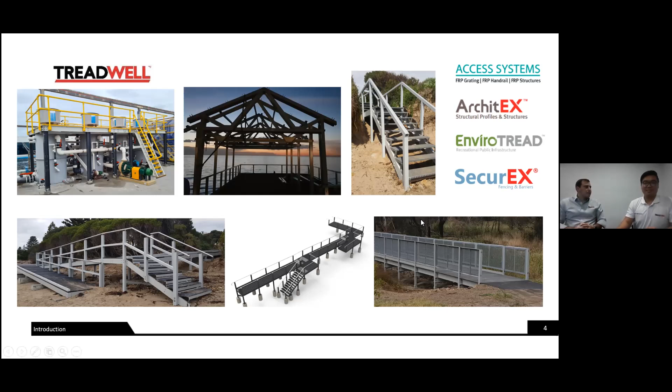So here are some SpaceGass model examples. So the modeling method will be the same as modeling timber structures or steel structures. However, in the market, there's no structural analysis software to help us choose the correct size of FRP member. Therefore, SpaceGass could only help us to determine the deflection and the required design loads like shear, bending moment, and tension and compression. So we can base on those design values and compare with the standard.

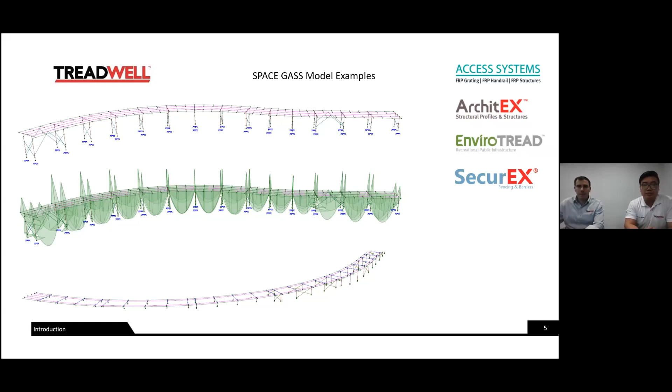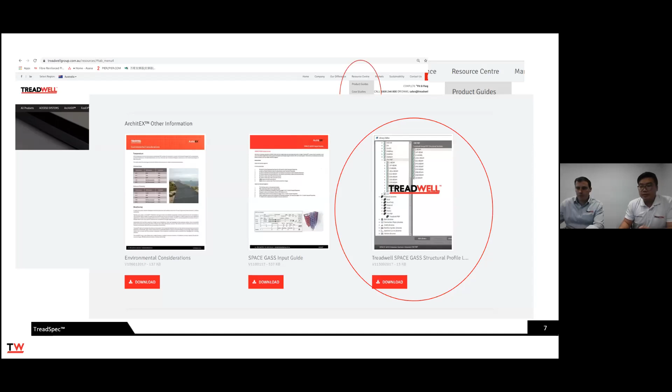So Treadwell Group provides the SpaceGass member library so that the user doesn't need to spend extra time to draw the layout of the sections. Now I will show how to download our profiles. First, go to our homepage and go to Resources Center. Scroll down and you will find a download button, and then you can click download.

After that, you can copy the SLM file and the SLS file to the SpaceGass library. And this includes the FRP material properties and also the Treadwell profiles. As you can see, you can download the I-beam sections, C sections, equal angle, and square hollow sections, etc.

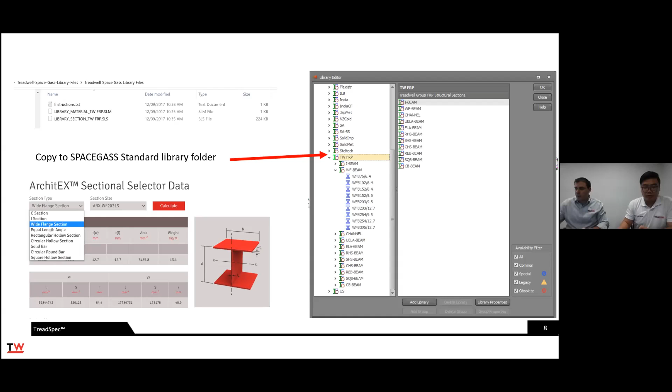So when you select the profiles, it will show the geometry of the section, like the moment of inertia, the height, the width, the thickness. For the Young's modulus of FRP, as you can see on the screen, we are using 19.6 GPa. So actually, it already considers some reduction factor based on the ACMA pre-standard, which considers the resin type, temperature, moisture, and if you need to consider the long-term deflection, like a longer design life or higher temperatures, or there are some extra chemicals, maybe you need to further reduce the Young's modulus.

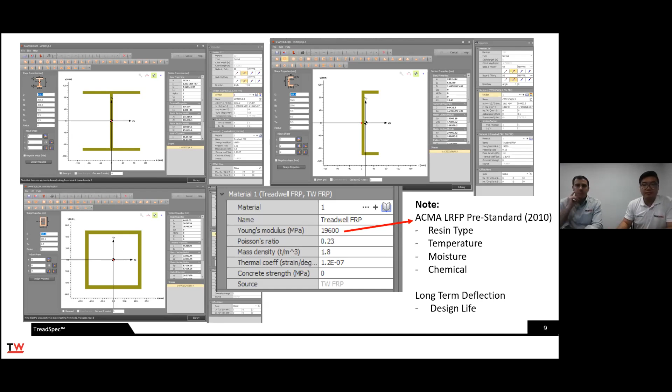Next, I will demonstrate an example. So the post spacing will be within 3 meters. The width will be roughly 2.4 meters. The height of the columns will be 0.7 meters to 1.5 meters. The live load will be 4 kPa. The wind region is A1. So as you can see in this example, we use different kinds of our Treadwell profiles.

Let's say the post, we are using a square hollow section, 102 times 8 mm thick. For the outer joists, we can choose C sections, 152 high times 9.5 mm thickness. For the inner joists, we can use the wide flange beam, 152 times 9.5. For the bearers, normally we will use double C channels, like 203 times 9.5. For the post bracing, we can use the equal angle, 102 times 9.5. So when we do the SpaceGass model, normally we will assume the joints as pin connections because FRP we can't fix them.

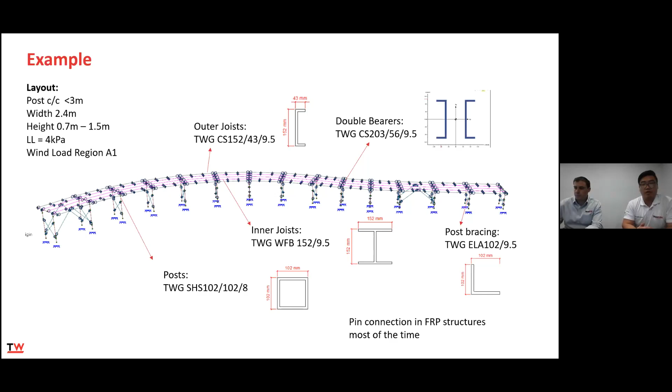So now we talk about the procedure for the design check. So as I mentioned in the beginning, we can use SpaceGass to do the checking for the deflections. Like in this example, for the inner joists, wide flange beam, the deflection is roughly 8.9 millimeters, which is smaller than the span over 250 or span over 300. So it passed the SLS. So the reason that I'm first checking the deflection is, unlike steel, FRP doesn't have that high Young's modulus. So based on our experience, most likely deflection will govern the design first.

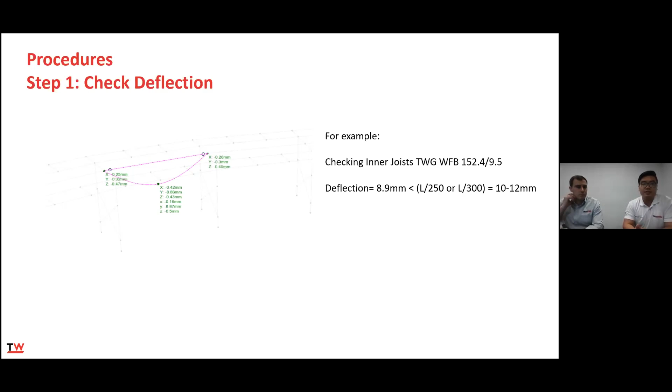So after we do the deflection checking, we can do the ULS checking, the ultimate limit state design check. So based on the SpaceGass model, we can know that the required bending moment is roughly 2.5 kNm. And actually, we can refer to the ACMA pre-standard in 2010. The reason we are choosing the ACMA standard is because it is the newest standard in the FRP market. And as I know, at the end of this year, ACMA will also have a new real standard, not a pre-standard. So actually, I think ACMA is a good standard to reference because they spend a lot of resources doing the testing. So back to our design.

So for the member capacity checking, in ACMA, we can check the material rupture due to bending. As you can see, it is 10.5 kNm. In the standard, we can also check the local flange or web local buckling. This is 22 kNm. Lastly, they also show the equation for how to calculate the lateral torsional buckling. So as you can see, if we don't put any bracing, it is 3 meter unbraced length. The member capacity can only be 1.5 kNm. So if we add one extra lateral bracing, the torsional bracing, it will become 4.1 kNm. So it passes the bending moment.

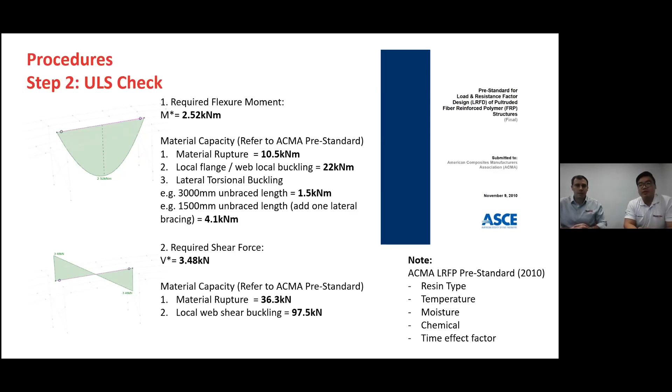Next, based on the model, we can also read the shear force in SpaceGass. So we refer back to the standard. For the shear force, we can check the material rupture due to shear. Second, we can check the local web shear buckling. So there's an important note that the value is based on the assumptions we input, let's say the resin type, the temperature, moisture, time effect factor. Of course, in FRP, at higher temperature, we need to put more reduction factor.

Third, I will talk about the connection check. So again, we'll refer to the ACMA standard. So based on the standard, it shows the layout of the connections. As you can see in the pictures, it mentions E1, the end distance, which is 4D or 2D. So D is the diameter of the bolt, let's say M12 or M14. It also shows E2, the edge distance, 1.5D.

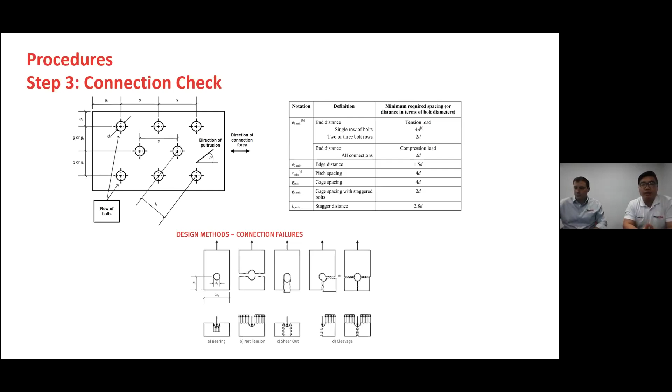So in FRP connection design, normally the most common failure modes are: first, pin bearing; second, net tension failure; third will be shear out. Now I will show typical connections for 152 height member connections. So refer back to our Space Gass model. We are using a 152 internal joist.

So when we do the FRP connection design, we need to check the primary beams, secondary beams, and the bracket. The reason I need to check is because in FRP connection, each component thickness is important, and also the direction of the fiber is also important. So we need to know whether we are designing the member based on longitudinal direction or transverse directions.

So in this table, it's showing that I've checked the connections based on the pin bearing, net tension strength, and the shear strength. As you can see, for the single lap connection, which means we only put one equal leg angle on one side, the strength is only 3.28, which is smaller than the required shear 3.48.

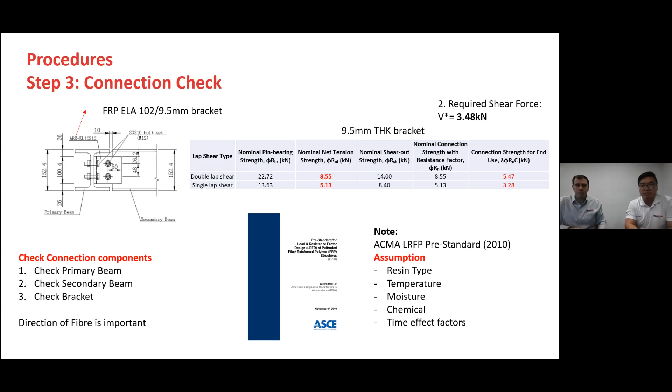So that's why we need to use double lap shear, which means we need to put 2 equal leg FRP brackets on each side, and it becomes 5.47, which is larger than required shear. So just note that again, we need to have a pretty clear assumption of all the resin, temperature, and time effect factor.

So lastly, we will check the post and bracing. First of all, we can check the compression and tension also based on the ACMA standard. In tension, we can check the tension rupture. In compression, we can check compression rupture. Second, compression global buckling. Third is compression local buckling.

For this, however, I think connection is still the most important thing in the post and bracing. The reason I'm saying that is you will find that you can use a really thin profile that can pass the tension or compression. But sometimes you will find that because the chosen thickness is not thick enough, the connection will fail based on maybe pin bearing or shear out on the bracing.

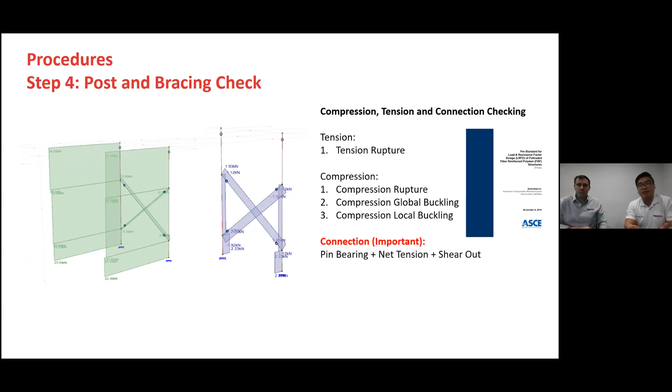So this is the end of my presentation today about Space Gass.